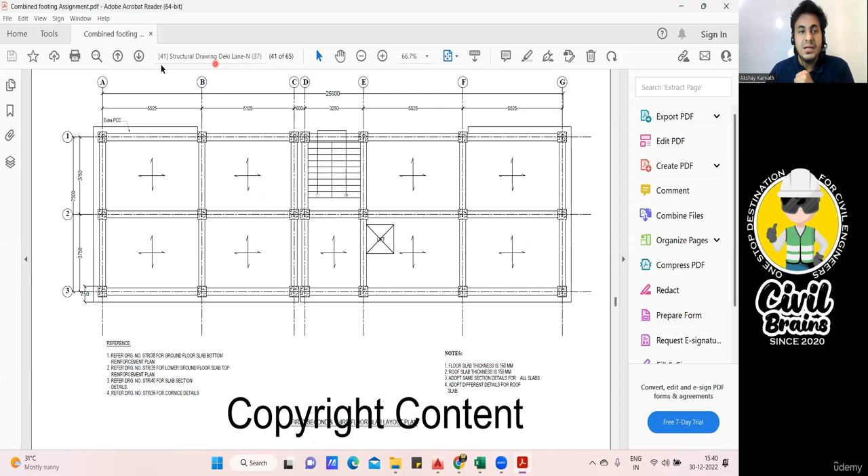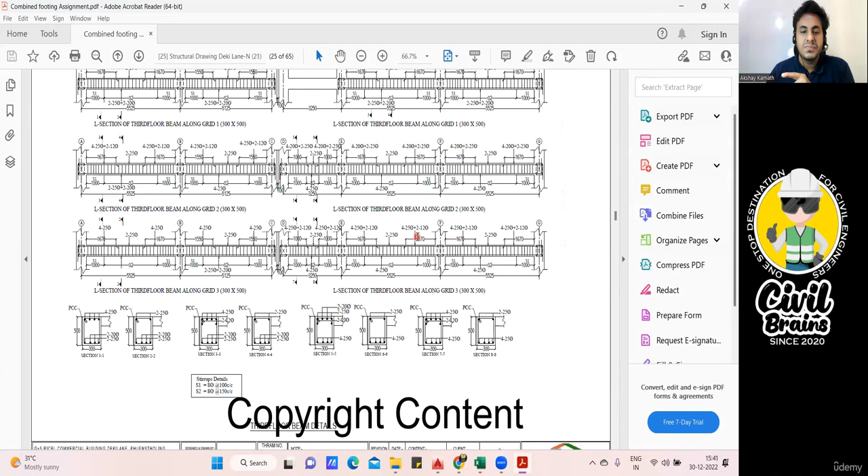So, in this lecture, we will see how the slab BBS has to be done, and we'll try to understand that. So, again, I've taken that combined footing assignment, and for this only, I'm going to do the slab. Again, the reason remains the same. If I take the residential building drawing which I have right now, you will not be in a position to understand how the reinforcement has to be done. So that is why I'll take this particular drawing first.

I'll explain you this one, and once we understand this, next as a kind of assignment, I'll be taking the residential building where we had done the footing BBS and all. As of now, I'll go with this. Okay. So again, it's very simple. Slab BBS. See, in this way, the slab is given, and you should remember a few things. In the slab, if it is shown something like this, it means it is a two-way slab. Just in case, if it is shown only one direction, it means a one-way slab.

Now, I'm expecting that you know what is one-way slab, what is two-way slab, because in most of my courses, I've explained you all those things. And if it is written something like this, it means the slab is a two-way slab. And what do you mean by this? It means that the load will go in all the four directions. If this is my slab, and if the load comes on that, this load will be transferred to all the four beams.

That is, on this beam, your load will go. On this beam, the load will go. On this beam, the load will go, and even on this beam, the load will go. So when they indicate something like this, it means the load will get transferred on this beam and only on this beam. Got it? So this is one-way slab and this is two-way slab. That's a basic understanding you should have.

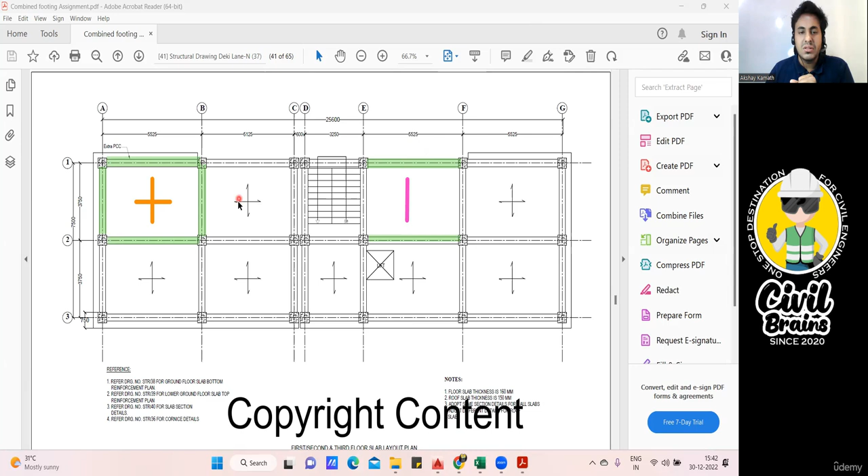But again, practically, I always say that all slabs are two-way slabs only. But all those things I've explained to you in a more detailed way in my construction methodology course. Right now, it's not required. It's enough for us to do the BBS. This is a two-way slab, and if there is something like this, it is one way. And in this project, if you see, everywhere it is a two-way slab.

Okay. Now, along with that, what is the thickness of your slab? That is mentioned here. Floor slab thickness is 160 mm. Roof slab. Why is it written roof slab thickness is 150? That means this particular drawing is for first, second, and third floor. And once you go to the next floor, this is fourth floor slab layout. And I think after that we have one more slab. Yeah, this is fifth or roof floor slab layout.

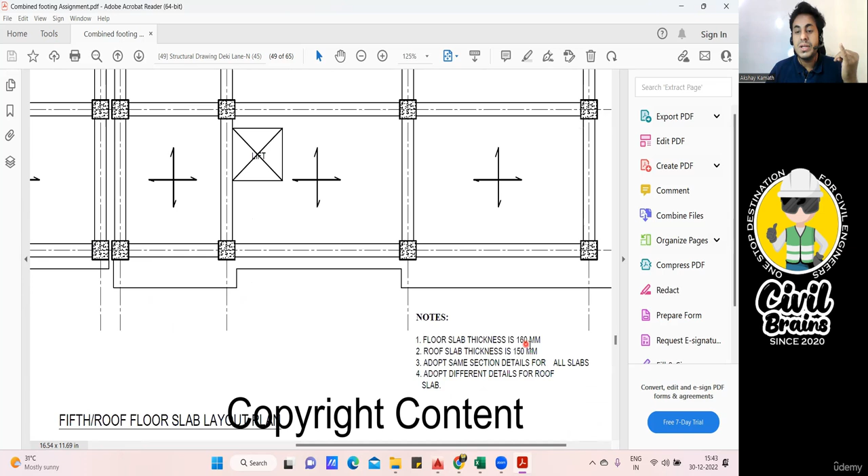And for this layout, you have to take the thickness as 150. You're getting my point? For first, second, third, fourth, you have to take 160 mm as the thickness of a slab. And since this is a roof layout, it's written here roof floor slab layout plan. Here you are supposed to take the slab thickness as 150 mm. Okay, good. This much is understood. We'll go back to that now. I think only this much we need to understand.

Now coming to the reinforcement part. Here in reinforcement, we have two types of reinforcement. One is called a crank bar. That is, you bring a bar like this, you give a crank, you take it in this way. Then you bring another bar like this, you give a crank, you take it like this. So this is a crank bar system. A few people use this.

But if you're doing an industrial building and all, people prefer to go with a straight bar. That is a cut reinforcement. That means you'll be having a bottom reinforcement like this. Okay, I'll do it like this. See, everywhere you'll have a bottom reinforcement. This is your bottom reinforcement. And in the same way, this is a bottom longer bar what I put.

Then you'll be putting a bottom shorter reinforcement. Okay, you'll be putting a bottom shorter reinforcement. So your bottom reinforcement is completed. Okay, there's a staircase, but still I've taken the bar. Let it be. And after that, you'll be providing the top reinforcement.

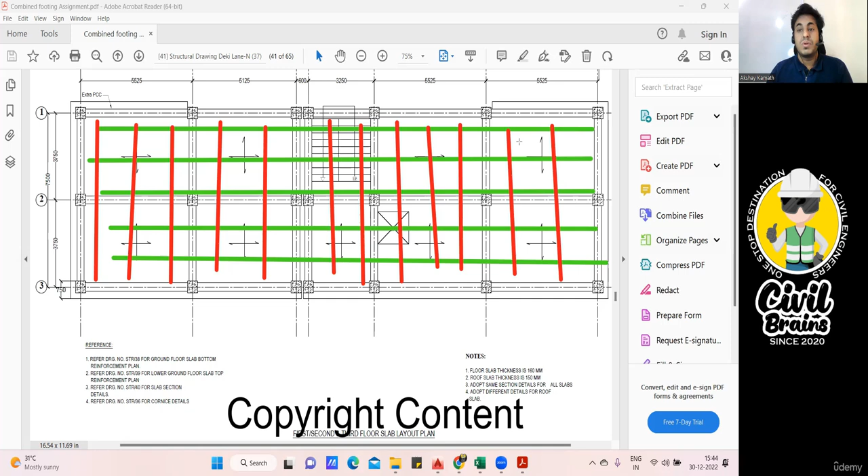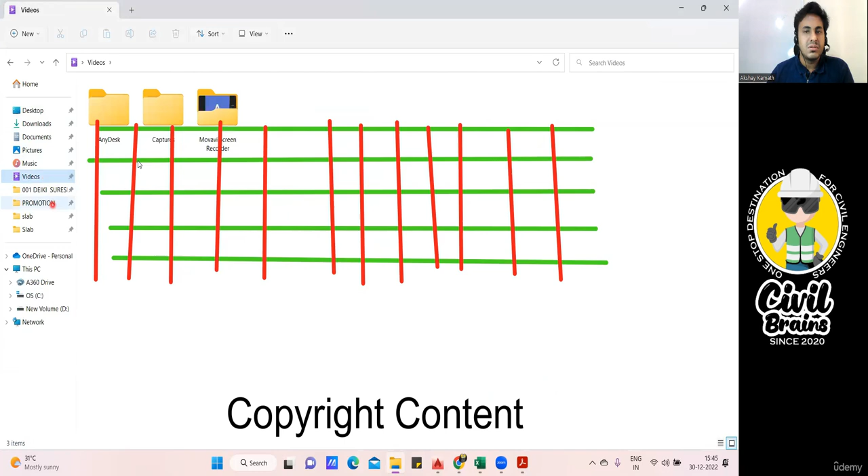Your bottom is done. Now, if you ask me, sir, how it's going to look practically, I'll show you how it will look practically. So practically, it will look something like this. So practically, this is how it looks. We'll be doing the BBS for this. That means this is your bottom shorter span. If this is my bottom shorter, we'll put the bottom shorter span all in this way.

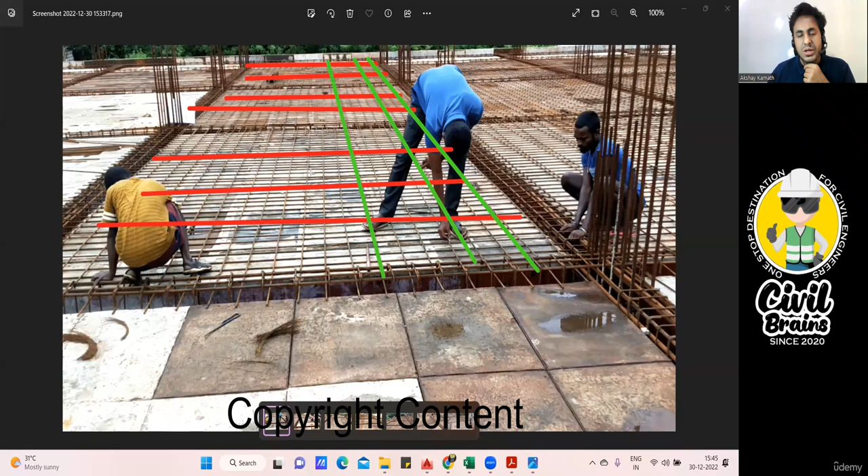And once the shorter span bars are put, we'll be putting the longer span bar. So this will be a longer span bar, which will be put like this. You can see practically the same thing has been executed on the site. So these are called straight reinforcement, or you can call this a cut reinforcement. Okay, fine, very simple.

So once this is done, next we'll be putting the top reinforcement. So this bottom reinforcement is done. Next is your top reinforcement. Bottom is done. After that, wherever you have a support, listen to my words, wherever there is a beam and column junction, there you provide top reinforcement. Like see, from here your top reinforcement will come only up to here.

This is your top reinforcement. Here, everywhere it will come. I didn't draw it, but it will come like this. And then here also it will come. Here also it will come. Then again here also it will come. Why will it come? Because here you have beam, here you have beam, here you have beam. So wherever there is a beam column junction, that will come. This is your top reinforcement along the longer direction I have put.

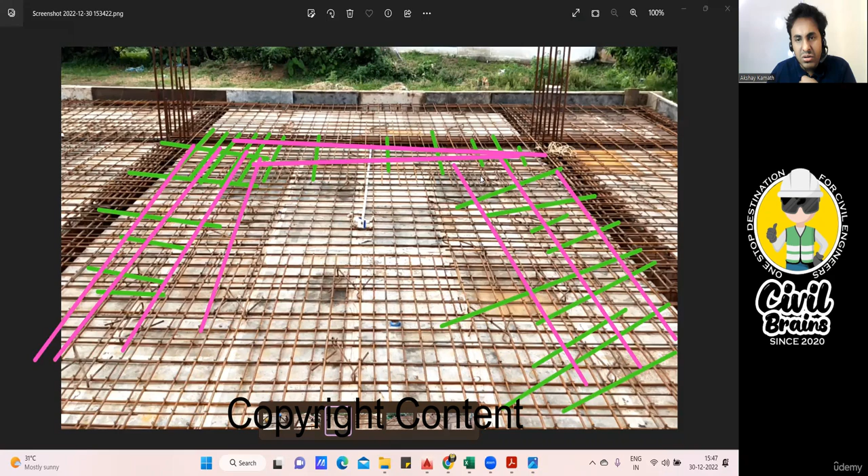In the same way, beneath this, wherever you put this bar, beneath that your distribution steel will go. You're getting my point? Beneath this, your distribution steel will go. Here also your distribution steel will go. Now, if I delete all of this, you can see practically the same has been executed. See, this bar, and in horizontal also it has gone in this way. This distribution bar also has gone.

I'll show you another image. See, practically this is how it looks. So this is your top, this side top, this side top, this side top. So if you want to see, it will be something like this. See how they are put. This guy is putting the bar. So we need to find the cutting length of all these bars in this way, and then we'll find the number of bars that is required.

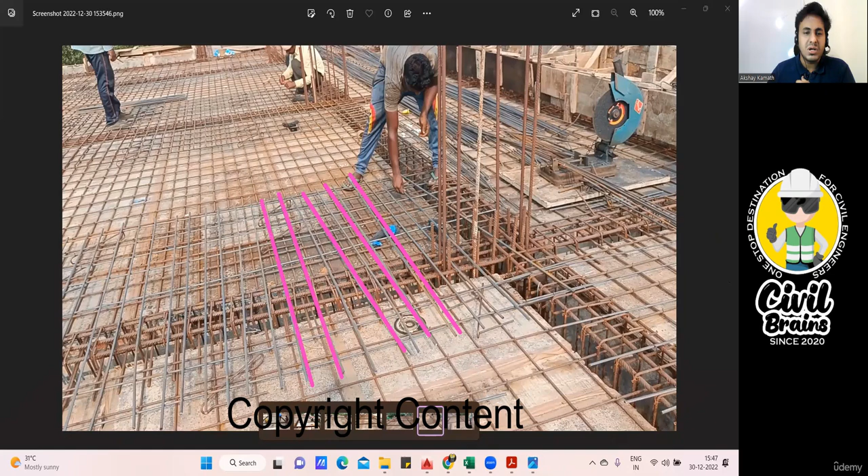So this BBS is very simple. You just have to understand the concept. Rest everything is very simple. This cutting length we'll find, then we'll find the number of bars. That's it. Your BBS will be ready. It will be something like, see, they have given this top, this side top. Now this is a continuous support, so this side also it will come.

So in this way, we have to prepare the bar bending schedule. Very simple. I'll tell you what all things you have to do. Bottom shorter, bottom longer. Then along the top, we'll be providing the bar in the shorter and also in the longer direction. Very simple. So it is understood. In this way, you are supposed to do it. So first, we'll start with the first bar.

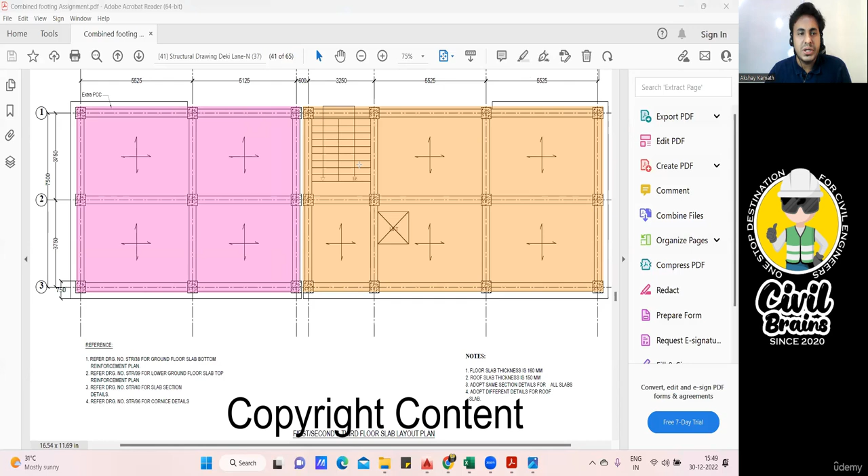So first, to make our calculation easy, I have taken this particular area. Only this area I have taken, because here you have a gap. So this is not a continuous building. You have a small gap here, and then this is another slab that we have. So first I'll teach you to do the bar bending schedule for this particular slab only up to this distance. Once this is done, the rest part I'll teach you after that.

Okay, this much is understood. Fine. Now for this bar, here only the layout is shown. They have not shown how the reinforcement will look. For the reinforcement, it is mentioned here. See, first, second, third floor slab, bottom reinforcement. Only the bottom they have shown. I'll consider only this much part.

So this is a slab. Now you tell me which is the shorter span. So this is 7,500. And this is how much from here to here? What is the distance? 5525, 5125. Roughly it is 10,000. So the shorter will be this one. So first I'll put this particular bar, the shorter span. I'll put the bars in this way.

Your bar will be from inner to inner. Okay, inner of the beam to the inner of the beam. You have to place the bar in this way. Okay, up to here it is inner. After that, here also we'll provide the shorter span bar. Okay. Then the shorter span bar is done.

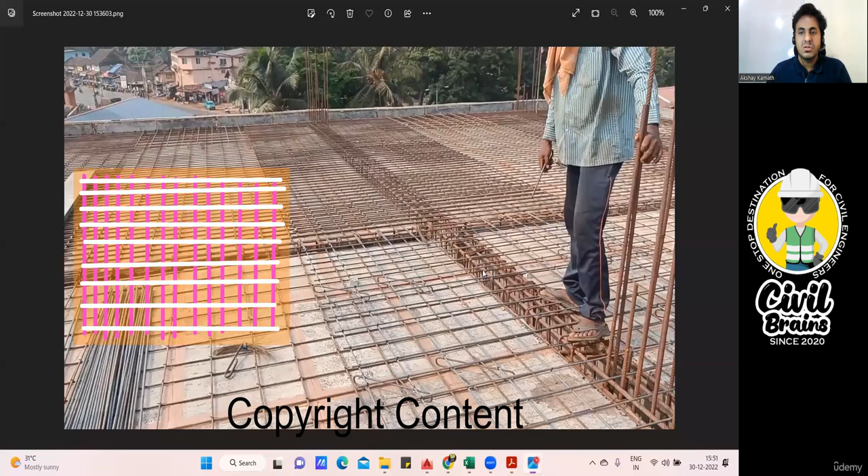So if you ask me, sir, practically how it looks, practically this is how it looks. So this is your complete practical thing. See, all the shorter span and longer span bars will come. Got it? Sure. We'll go back. Fine. Now, other than that, what is the diameter of the bar?

Everything is mentioned here. If this is a shorter span bar, it is mentioned you have to provide a 10 diameter bar at 150 center to center spacing. Your shorter span will be 10 diameter at 150 center to center spacing. Now in the longer direction, that is also a main bar. Since it's a two-way slab, shorter and longer both will be main reinforcement.

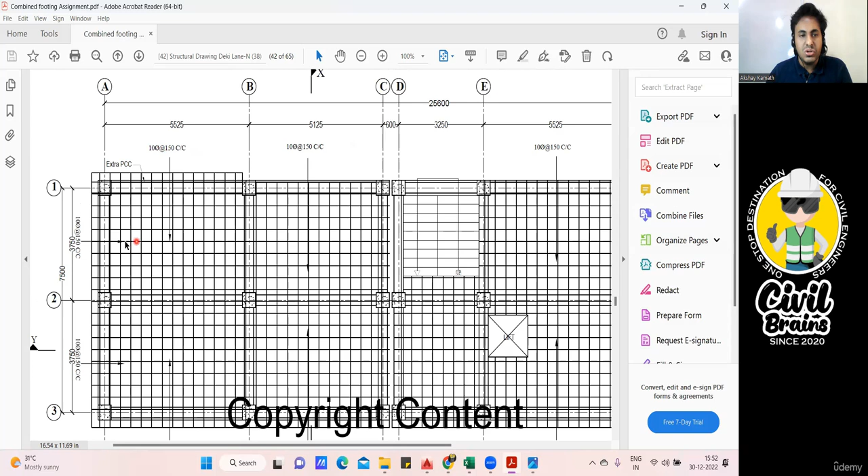And this side bar, whatever we have put, that is also 10 diameter at 150. They have shown this bar. Okay, 10 dia at 150 center to center spacing. This much is understood. Great. So one thing you need to understand: whenever you're putting the bar in the shorter direction, when finding the number of bars, it has to be along the longer direction.

So what I'm trying to tell, if I delete this, if I'm putting a bar in this direction, I'll put the bars in this direction: this one, this one, this one, and so on. Okay, fine. So how will you find the cutting length? Cutting length is very simple. I need to find this length to this length.

For that, these people have already given me the center to center distance. I'll explain it here only. Next, we'll do it directly on the Excel sheet after that. So they have given me this center to center distance. How much is it? 7500. So in that, if I deduct this one,

if I deduct half of the beam from here and half of the beam from here, because I told it has to be from beam inner to inner, but the distance 7500 is given from center to center. So if I deduct half of the beam on each side, will I not get the clear span distance? Obviously, I'll get the distance from here to here.

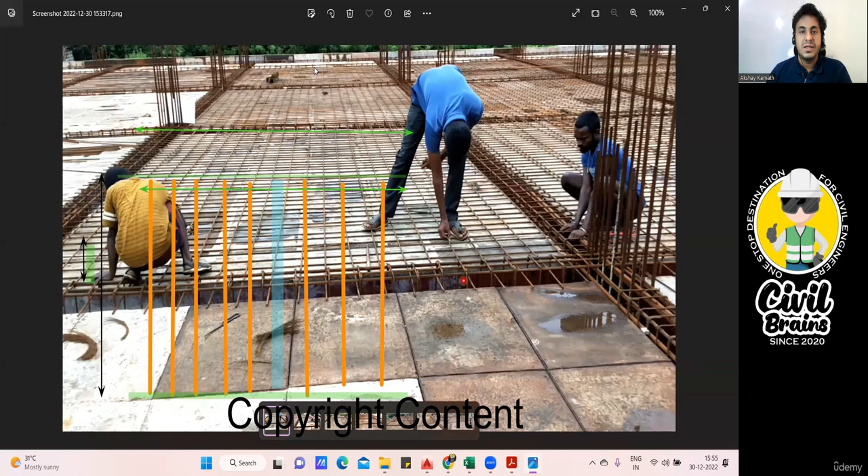See, your first bar, for example, this horizontal first bar we have placed, is not placed over the beam. These are the beam reinforcement which we already calculated. This is starting from here. That is why whatever is the width of your beam, we need to deduct. Getting my point? If this is not clear, let me show you one more image.

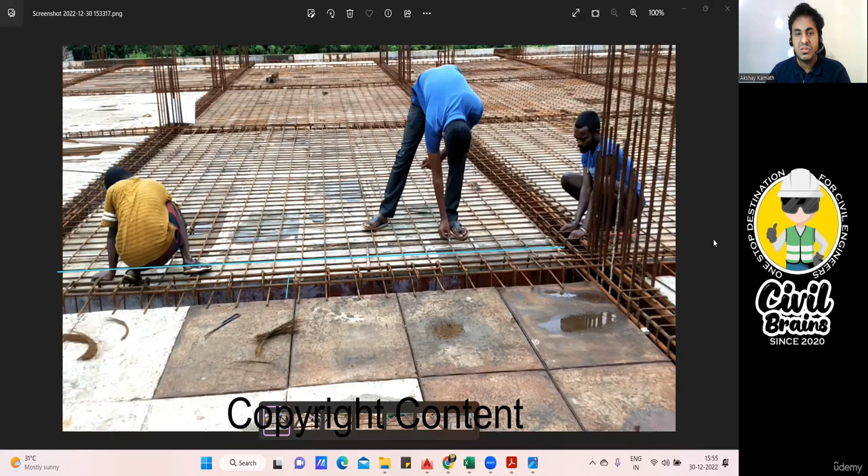Yeah, I can show here also. See, this guy is putting the rebar, right? He'll not keep the rebar over the beam. He'll start his first rebar from here. So if I want to find the distance, then what will happen?

Since it's continuous, I'll show it here. Let us consider from this beam center to this beam center, it was 5125 and 5525, whatever was given. Here you have one beam. On this beam, is there any bar coming? No. So then I need to deduct this beam from the center to center distance, half from the left side, half from the right side.

From here, I'll deduct half beam. From here, I'll deduct half beam. But here in the center, I need to deduct the complete beam size. Only then I'll get the clear span from here to here and from here to here. Agree with me? Great. So with this understanding, we'll go back to where I was.

So this one half from here, and this middle beam, if I deduct, I'll get the span here. And whatever span I get, if I divide that by the center to center spacing of the shorter span bar, which is 150, written here, I'll get the number of bars.

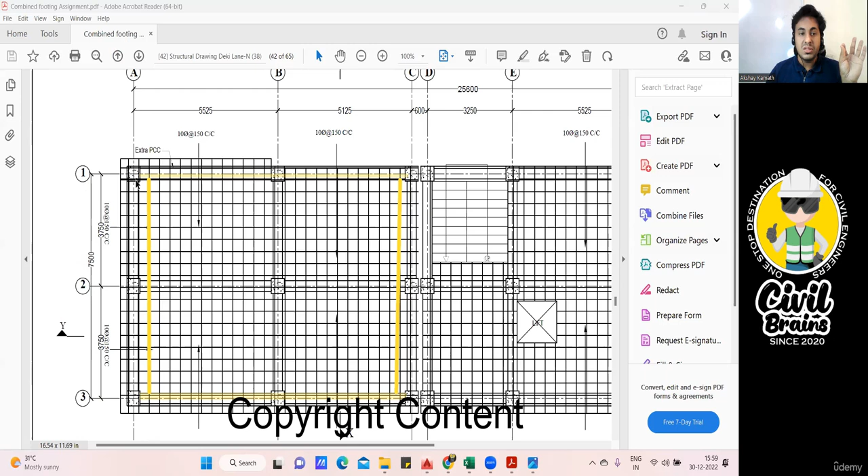Now, what is the width of the beam? You just have to come here, I'll show you that also. It will be written. We are in the first floor layout, right? So you have to come to the first floor layout. So this is third floor. Okay, so this is the first floor beam layout.

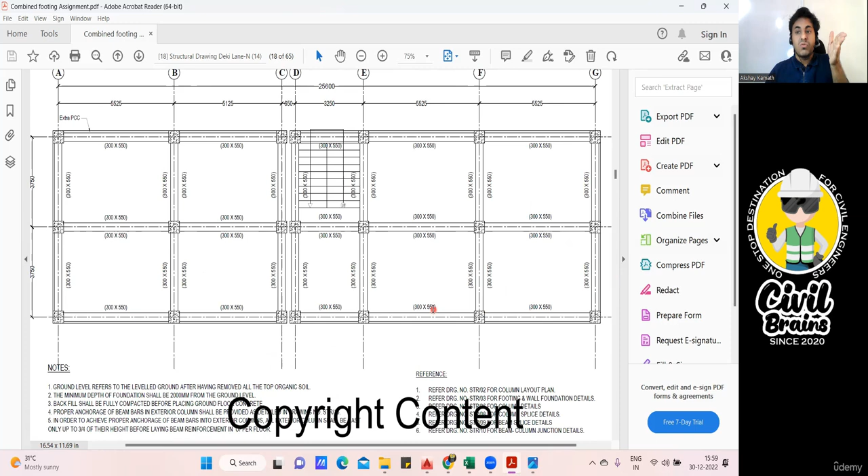And what is the width of your beam? See, the width of my beam is 300. Everywhere it is exactly 300, you don't have to worry. That means half of 300 is 150. 150 from here, 150 from here, I need to deduct. Very clear. Pretty simple. So with this understanding, I'll move forward to the Excel sheet now.

Yeah, this is what I want. First slab, bottom reinforcement. Fine. So I have done the same thing here. See what I have written? 3750 from this center and 3750, that is 7500, minus 150 from here, minus 150 from here. Got it? So the straight length we got is 7200. From here to here, it is 7200.

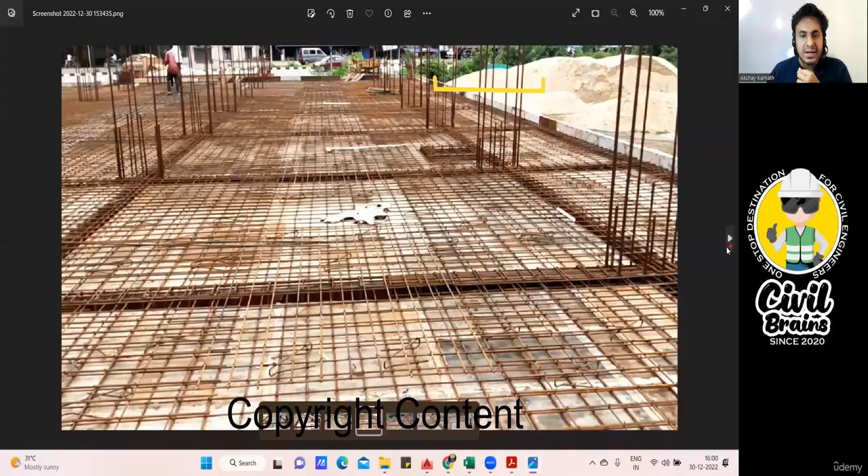Now, this is not how you put the bar. The shape of your bar will be something like this, like the beam case, when you put the slab reinforcement. I'll show you that live. We need an end one, only in the end portion can I show you that. Right now I cannot show you that because it is not there with me. No problem, in the next lecture, if I get a chance, I'll show you.

What I wanted to tell is, only in the end portion, this bar will not go and lie here straight. It will take a bend here. A small development length will be given, so that will go inside the beam. You have a beam running here, so it will go inside the beam. That is the shape you get. This end bar will not be straight, it will get a small bend here. So now you know how to find all those things.

So this is that portion I want to find. Now with that understanding, your bar will come here. This was my clear span. After that, your development length will start. Will it go full? No. It will go up to this distance: the width of my beam, minus the cover, gives that L length. So this L length from here and L length from here. But that bar won't be like this, it will bend in this way.

It will bend in this way. So I'll bend it. I'll bend this bar like this. Got my point? So I'm just concerned with this length now. I want to find this straight red portion, and that L shape I want to find. How much is this straight L portion?

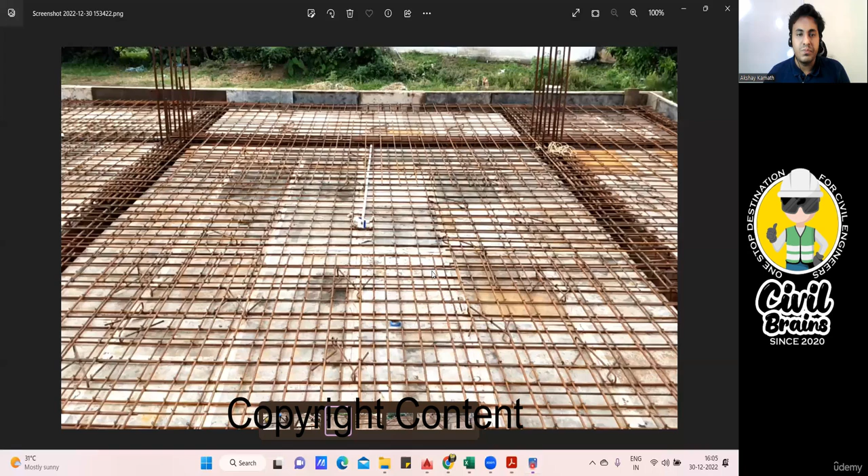And ultimately, you take the decision on the site. If you have a good engineer on site, or your manager says that in the earlier project we used to take, let us say, 50 times the diameter, then you do accordingly. But right now that development length is not given to us, so I'll go with this method. So this is what we are trying to do. Here I cannot show you that. Anyhow, that L is not seen anywhere.

That L will be actually seen in the corner part because this is all straight, no? If this is a corner, then this guy will bend the bar in this way. Okay, fine. So simple calculation. What I did is my slab thickness is 160 minus slab cover of 20 mm. So from the top 20 mm I deducted, and from the bottom 20 mm I deducted. I got 120 mm. On this side also I got 120 mm. Here also I got 120 mm. Simple.

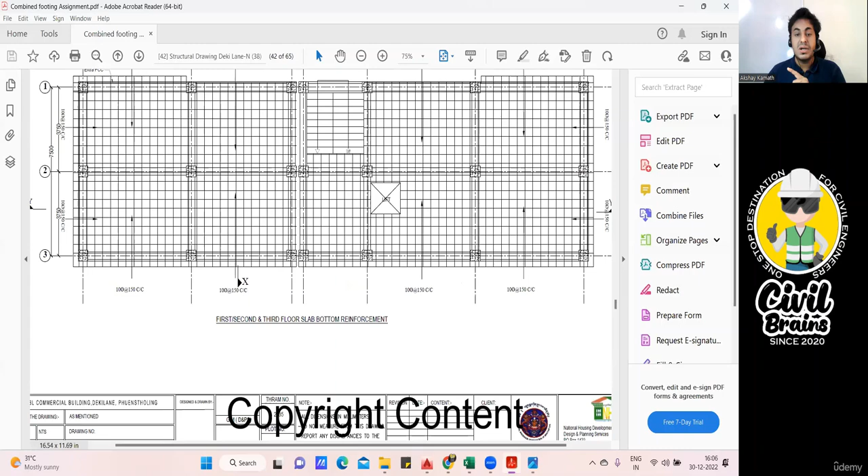If you understand this, next is number of member 1. What is the dia of the bar? It is given in the drawing. It is a 10 diameter bar. Everywhere in this project, you are using a 10 diameter bar at 150. So that remains common. Just write 10 and spacing is 150.

Now the important question comes. That is to find the number of bars. So number of bars is very, very important for us. So how will you find the number of bars? I'll do it manually in front of you. To find the number of bars, I have this 5525. So I'll write it here. Why am I taking 5525 and not this portion? Because the bar is already laid in this distance. Bar is being laid in this

way. So if the bar is being laid in this way, we always have to take the opposite direction to find the number of members. So my opposite direction this time will be this portion. So I'm taking 5525 plus 5125. This will be from this center to this center. But I want clear span.

To get a clear span, I'll explain only once, the rest you have to do. I'll deduct half the beam width from this side and half the beam width from this side. So what is the beam width? We know beam width is 300. Half of 300 is 150. So from this side 150 and from the right side 150. Is it correct? Yeah, we are correct.

But still the problem is when you lay the bar, after this bar, you don't lay the next bar directly on the beam. You don't lay any bar here. The next bar will start again from here. That is why we are saying we have to take clear span. In 5525 plus 5125, center to center, this beam width is already considered. But since no bar is being put over there, we need to deduct the size of this beam.

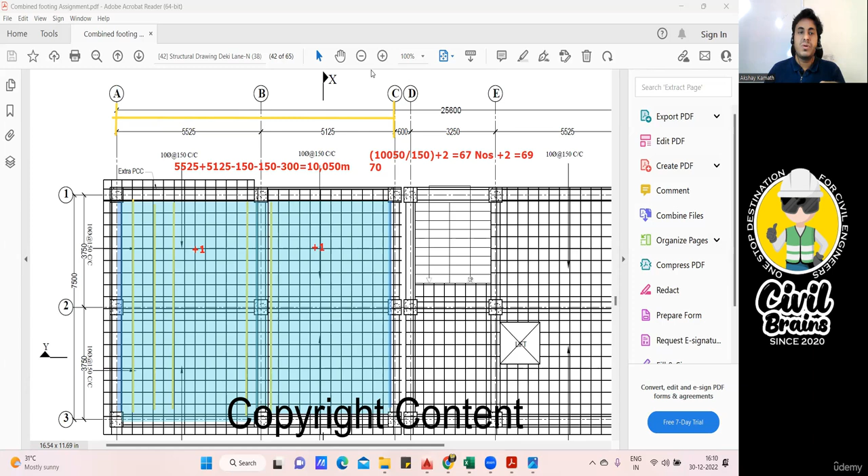So the answer should come 70 number of bars. How much? 70 number of bars. I'm not sure what I got in the Excel sheet. Yeah, 69 I got. 69. Okay, 69 I got, then it is correct. No problem. Okay, fine. 69 is the right answer. Even though you do round up, you see the same thing we have got. Round up will happen only when the decimal is coming. And in the manual calculation, we directly got 69 only, no? So there's no point of rounding it up again.

Okay, so now I've done the same thing. 69 I got. What I've done, you know all these things. Round up, open bracket, 5525, plus 5125, minus 150 from here, minus 150 from here, minus the width of the middle side, minus 300, divided by the spacing. The spacing is 150.

And what I did, this is very important, +2, because 2 spans we are doing continuously. If you had done this one first time and this one first time, then also we'd have added +1, +1. So 2 times I'm adding +2. Understand the logic of applying +2 here. Actually, it is +1. Since we are taking 2 slabs continuously, I'm doing 2 times, so +2. And put that comma, put a 0 and close the bracket. 69 number of bars you're supposed to place. Finish. Your bar bending schedule is ready.

Now, I want to find the total cutting length. Total cutting length anyone can do. 120 plus 275 plus 7,200 plus 275 plus 120. Add everything. You'll get the total cutting length. Now again, this is actually cutting length. But since one 90-degree bend is coming here, another 90-degree bend is coming here, so 2 times bend deduction we are supposed to do. Now again, bend deduction is totally up to you. If you want to do, apply the bend deduction. I already applied minus 4 into D because 2D is 4D. 4 into 10 if I do, I'll get the answer.

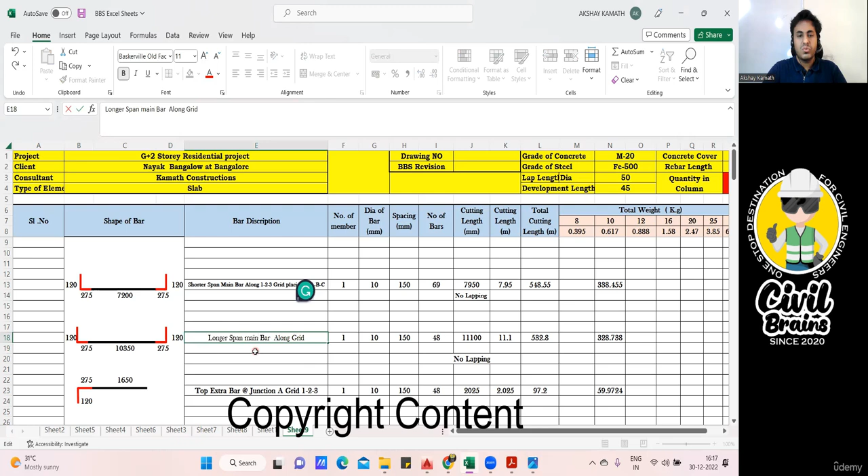So you have to name it here: longer span bar along the grid. Write what grid it is. Here I've written shorter span main bar. Here longer span, it is again main bar only since it's a two-way slab. Longer span main bar along the grid. Which grid are we doing now? Longer span we are placing along ABC grid, laying in 1, 2, 3.

Along grid ABC. Along ABC, it's enough. If you want, you can write laying in 1, 2, 3 direction, else it is okay. Or you write placing in 1, 2, and 3 direction. Okay. Now you just reduce the size of this.

Okay, fine, good. Now the number of members will remain the same. Dia will remain the same. Spacing is also 150. Now coming to the number of bars. See, round up. Always you have to round up whenever you find the number of bars. Round up 7,500 minus half width from here, minus half width from here, so minus 150 minus 150.

And in the middle, we had this beam, no? This middle beam also you need to deduct. That is 300, so minus 300. Close the bracket, divide by the spacing. Spacing is again 150, plus 2, I have done, because I took 2 spans. I took this span and this span.

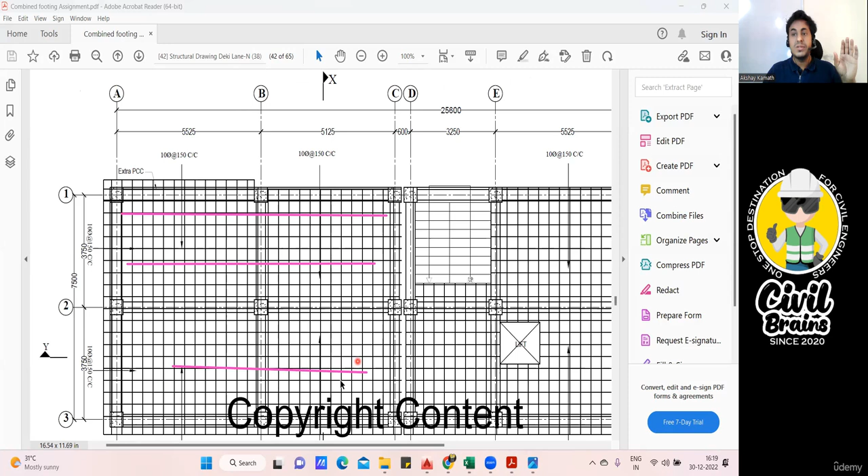Now there may be a few students who may tell, sir, the bar is being laid in this direction, but we have 4 spans, no? See, the span is only 2. Don't consider this is span 1, this is span 2, 3 and 4. No, for this complete thing, you'll be adding 1 plus 1, only 2 times, okay? Okay, chalo, finish, that's it.

So if you do that, you'll get 48 number of bars. And for total cutting length, you add everything: 120 plus 275, 10,350, 275, 120 will give you 11,100. Again, you need to check whether the distance is greater than 12 meters or not. If this distance was greater than 12 meters, we should have given a lapping. But here, this distance is less than 12 meters, so one straight bar is enough to take care of this.

Okay, fine. So total cutting length will be 11,100 divided by 1,000, which gives 11.1 meters. So total cutting length will be 11.1 into number of bars, 48, into number of members, which will be 532.8. And this is a 10 diameter bar. So the weight will be 532.8 multiplied by 0.617. This will give me the weight of my steel. That's it. Got it? Great.

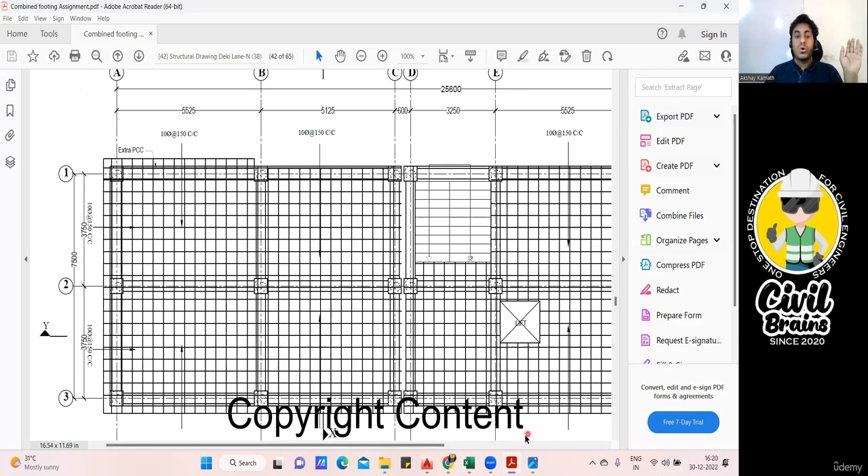So in this way, we have finished our bottom reinforcement completely. For this particular area, bottom reinforcement is done. Your BBS is ready for this complete span, only the bottom reinforcement. If somebody comes and says that tomorrow we have to place only the bottom reinforcement for this slab, and today I need to order the steel, can you tell me how much steel is required? Just do the calculation here: this answer plus this answer.

You tell them you require almost 600 kg of steel, and that too 10 diameter, so that he can call the hardware shop or the vendor. I'm giving an example. You don't just call for 600 kg; you do every estimation and accordingly you plan. But just in case somebody asks, you tell them 600 kg of steel is required for the bottom reinforcement of this slab panel with 10 diameter bars at 150 center to center spacing.

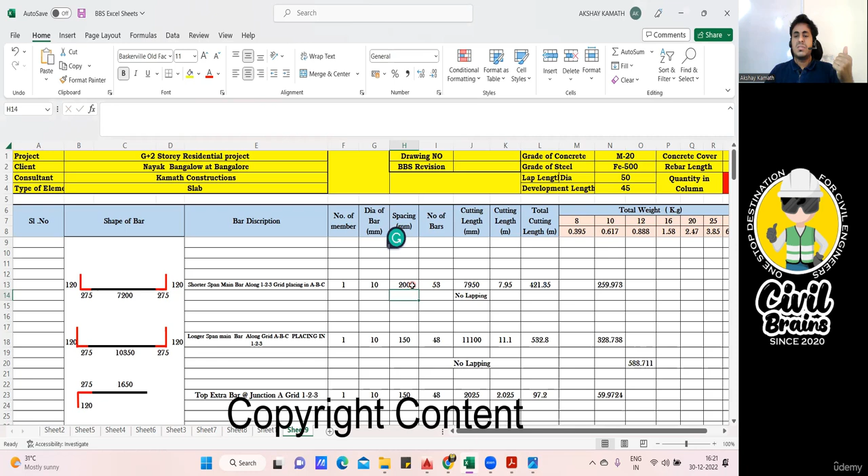Now, the power of the Excel sheet is, if tomorrow your consultant says, instead of 150, we will do 200, finish, the answer is ready accordingly. See, if it is 200, the answer has come down to 513 kg. Spacing increased, the number of bars came down. Accordingly, everything changed: total cutting length and weight also change. But I'll keep 150 only, just to make you understand.